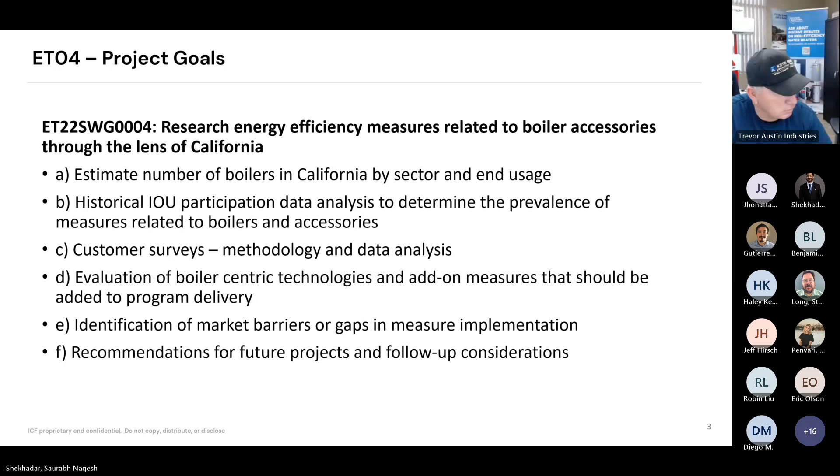This slide summarizes the project findings. We interviewed about 25 boiler manufacturers and distributors and derived or identified 11 add-on related measures from those discussions. Also, we identified about 10 measures from literature review as well as US Department of Energy tip sheets. The estimated efficiency increase ranges for all the identified measures and technologies from 1% to 8%.

As far as the barriers in measure implementation are concerned, we identified that some of the barriers were space constraint, variability in sizes of boilers, as well as high upfront cost. During the course of the project, at different milestones, we segregated the identified measures into three categories: near-term hits for the program, suitable for field or lab testing, and the list of non-viable measures.

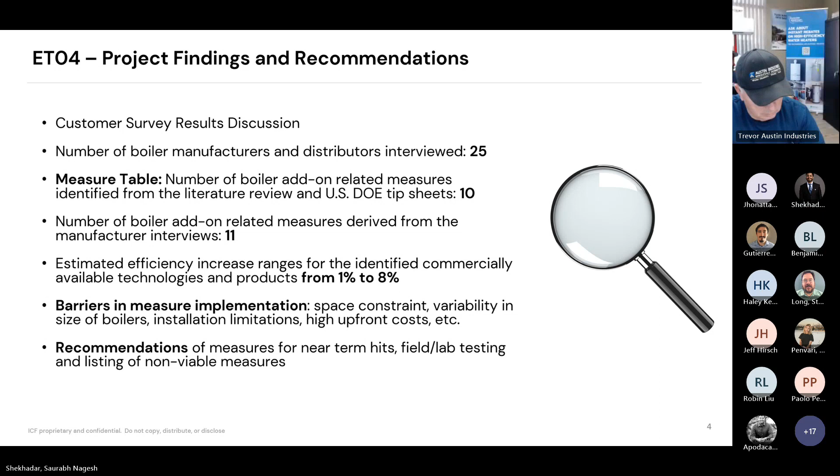Boiler systems are used to produce steam and or hot water, which is used for several primary purposes, such as space heating, domestic hot water usage, and pool heating. The boilers are further categorized into industrial, commercial, and multifamily types.

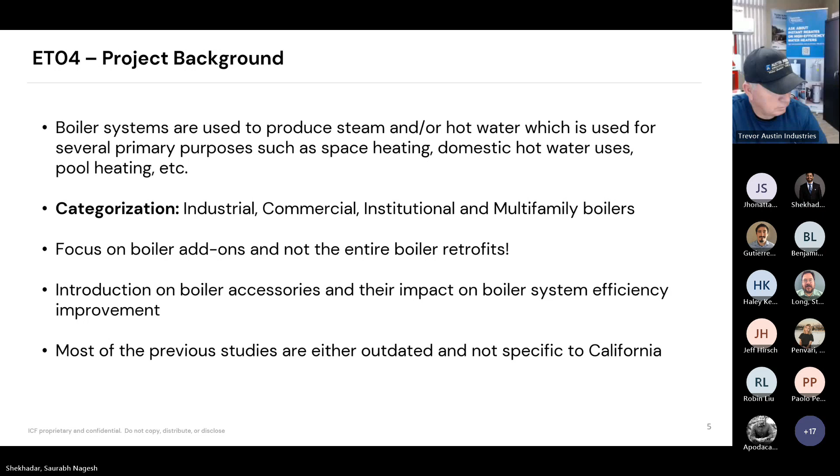This project focuses primarily on boiler add-ons and not the entire boiler retrofits. The objective was to learn more about emerging technologies in that segment and their impact on boiler system efficiency improvement. So let's proceed to the next section, which is literature review.

This slide summarizes the boiler inventory characterization in the US. As you can see in the first pie chart, the natural gas boilers are lower capacity boilers compared to other fuel types. You can see the segregation with respect to different fuel types as well as their installed capacities, for the entire US, and also the categorization of boiler counts in the state.

For estimating that inventory, we leveraged multiple data sets. The first one being publicly available boiler licensing data, shared by air quality management districts in California, compiled from the data shared by about 10 AQMDs in the state. The second source for estimating boiler counts was the Cadmus multifamily study, conducted in 2019. You can see the numbers and their categorization with respect to different sectors such as multifamily, industrial, and commercial.

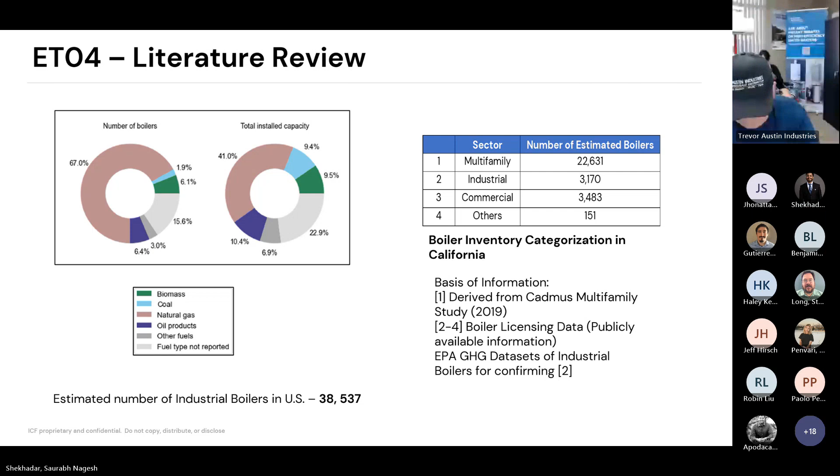These are the findings from the Cadmus multifamily study. One of the important findings was that the end usage most often served is domestic hot water heating, and pool heating is the next prevalent use. As far as the utilities are concerned, SoCalGas territory has the highest number of multifamily boilers among the three major utilities in California.

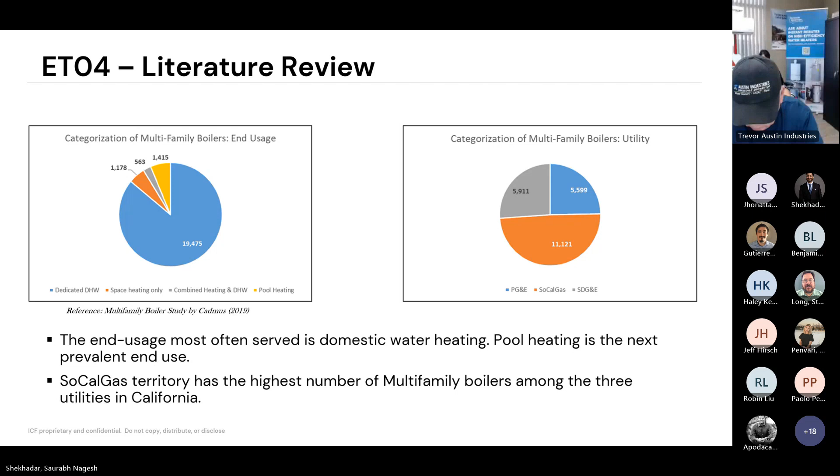During the literature review milestone, we also reviewed boiler studies previously completed in other states, such as Oregon and Minnesota. This slide summarizes the findings from those studies. The Oregon study highlighted that focusing on improving the design and performance of condensing boilers is important. Also, another field study indicated that on-field operation had better than expected space heating performance for condensing boilers.

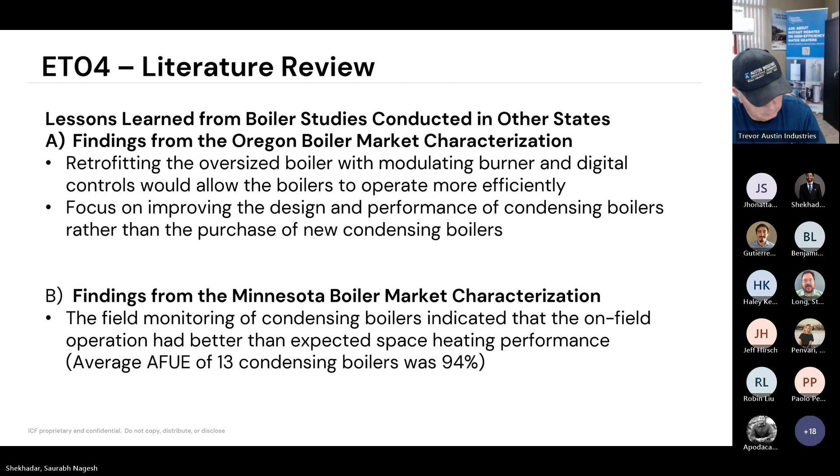Let's move on to the next step where we reviewed the US Department of Energy tip sheets. USDOE has published several tip sheets, particularly for boiler accessories, and we reviewed and understood some fundamentals of that and correlation between different parameters and their impact on efficiency improvement as well as fuel savings. These are some of the snapshots pulled out from those tip sheets.

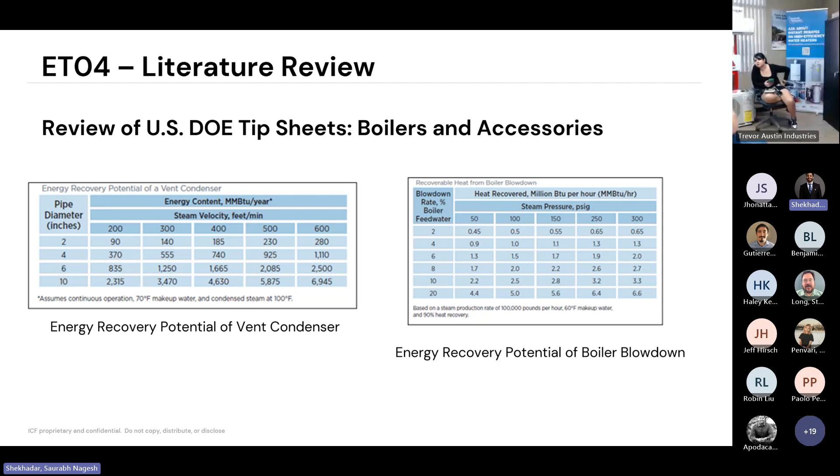Also, those indicated some rules of thumb in industry, which is helpful in estimating percentage fuel savings or percentage efficiency improvement. These are tip sheets related to burner upgrades as well as energy recovery potential of economizers.

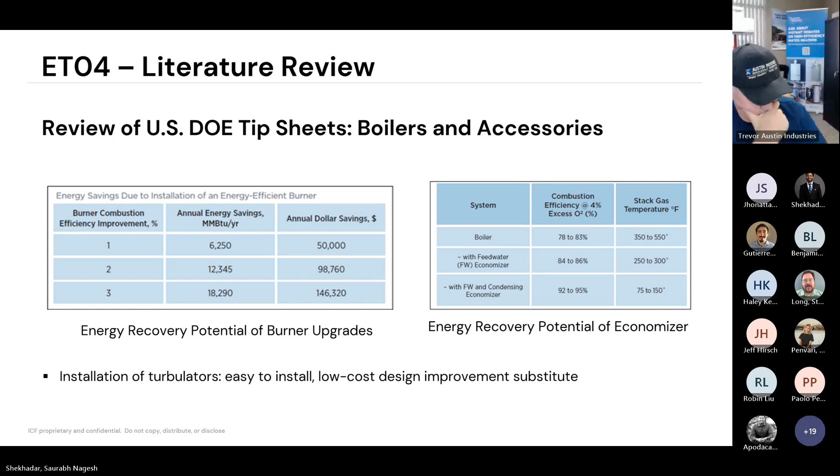The next milestone or the next section is historical IOU participation data analysis and customer surveys. California Energy Data and Reporting System, which is CEDARS, manages California EE program data reported to the Commission by IOUs and RENs. We analyzed these claims submitted during the period of last 5 years, starting 2018.

We also categorized the claims in different sectors, such as commercial, residential, ag, and industrial. And we saw that there were significant number of claims submitted under commercial and residential sectors compared to agriculture and industrial.

Some custom category claims were also identified or included, which were VFDs on combustion fans, stack economizers, system insulation, etc. But this highlighted the significant opportunity for measure package development related to boiler add-ons.

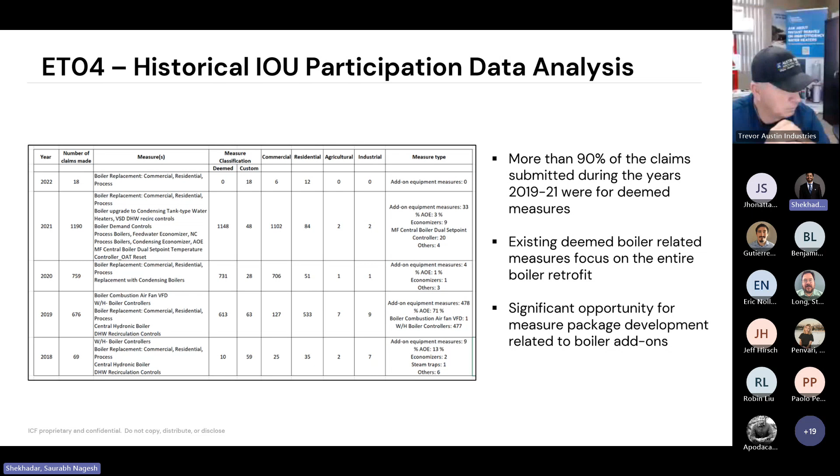As I said before, customer survey was an important element of this study, and we reached out to about 4,400 contacts, customer contacts received from AQMDs, as well as confidential data requests from SoCalGas.

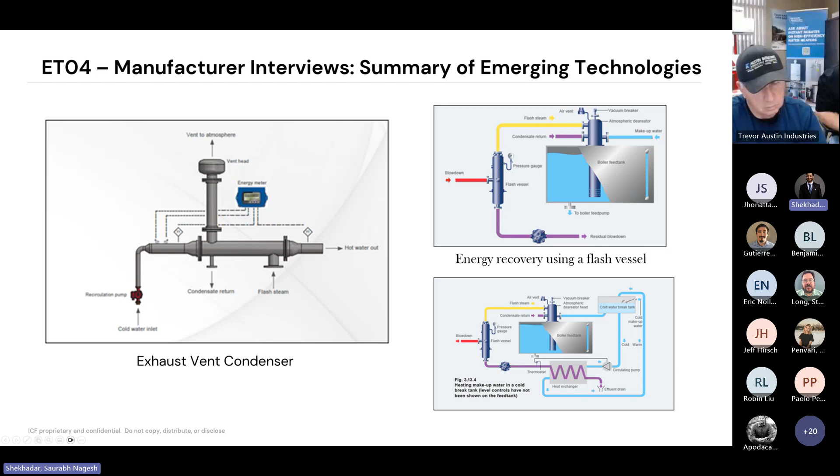Boiler blowdown is carried out to control the amount of TDS in the boiler, and the discharged water is hot, dirty, as well as pressurized. This generates a lot of flash steam when released at atmospheric pressure, which provides an opportunity for heat recovery. The second half of the slide discusses incorporation of a flash vessel, used to recover energy from flash steam, which facilitates separation of hot water and flash steam. The flash steam directly goes to the deaerator, and a heat exchanger increases the temperature of boiler feed water using that hot water. A cold water break tank is useful for applications where there is no simultaneous flow of boiler blowdown and makeup water. This technology is estimated to increase boiler efficiency by 1.7%.

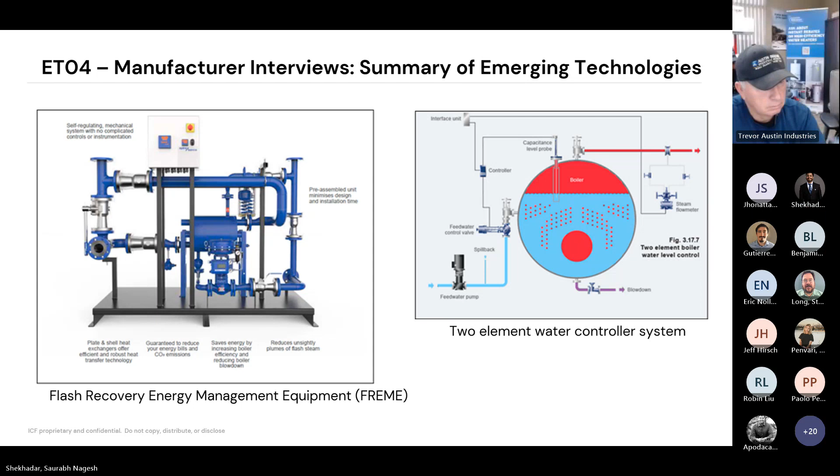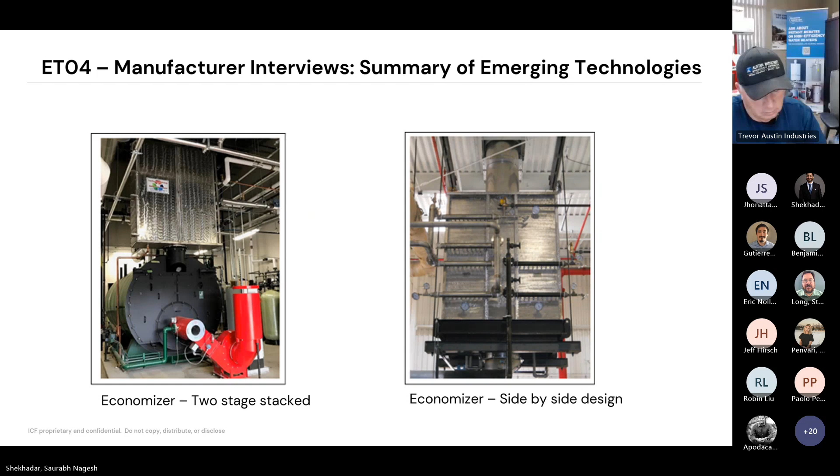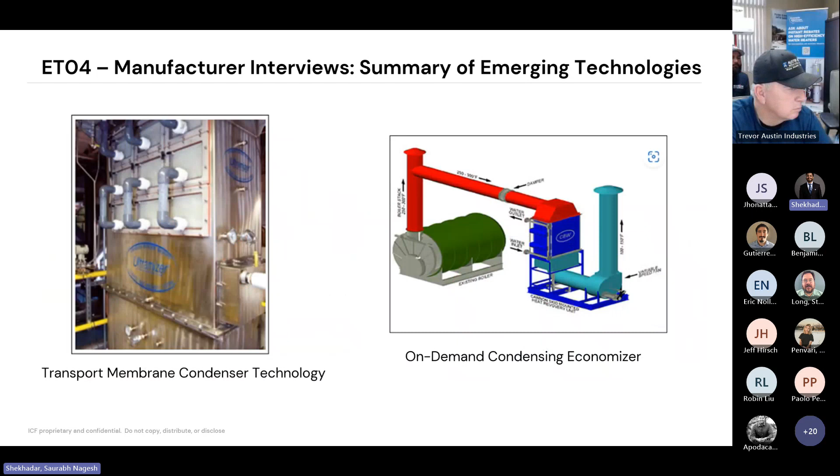The second half of the slide is on the on-demand condensing economizer, which is suitable for sites having space constraints, and this heat recovery unit can be installed at, say, 100-foot distance from the boiler and can be invisible to the boiler system. The operation of the unit takes place when hot water is needed and heat is available. For this one as well, multiple boilers can be teed up to one on-demand economizer system, which is another advantage. But there's addition of a control system as well as a fan to avoid any back pressure and condensation concerns. The manufacturer indicated that typical payback for this system is 1 to 2 years - the on-demand economizer one.

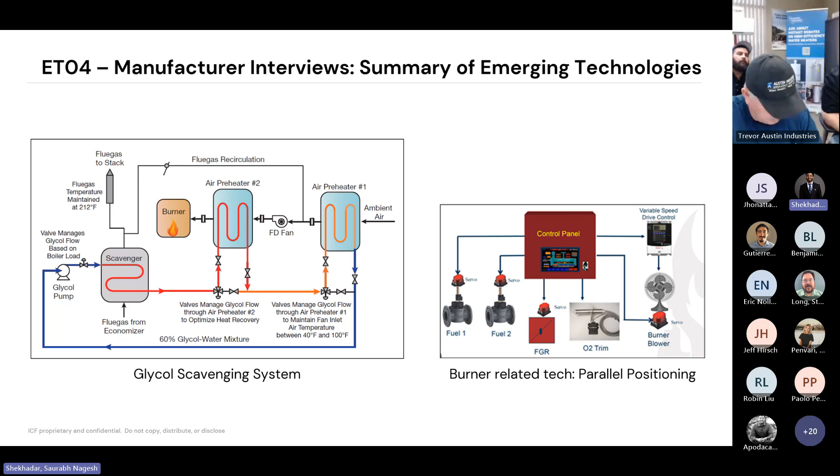This slide also has FGR, which is flue gas recirculation. Again, it's an effective way of reducing NOx, but it has negative or no major impact on increase in boiler efficiency percentage.

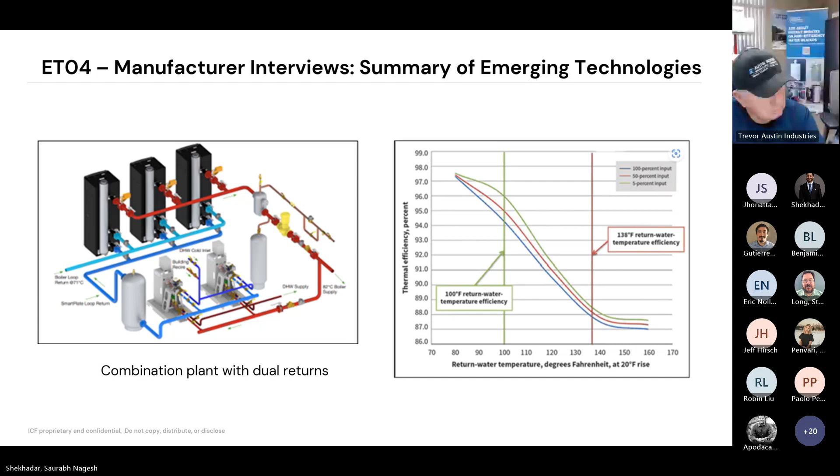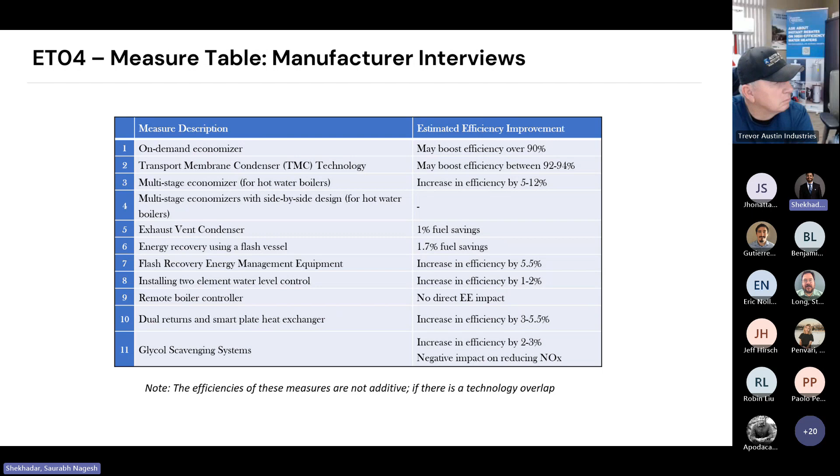So we talked about different products, equipment, and systems or technologies in the boiler accessories segment. This is the summary of different measures and the efficiency levels. I tried to share the levels in terms of ranges or tentative figures which were shared to us in those interviews or discussions. But please note that those efficiencies are not additive, particularly if there is a technology overlap.

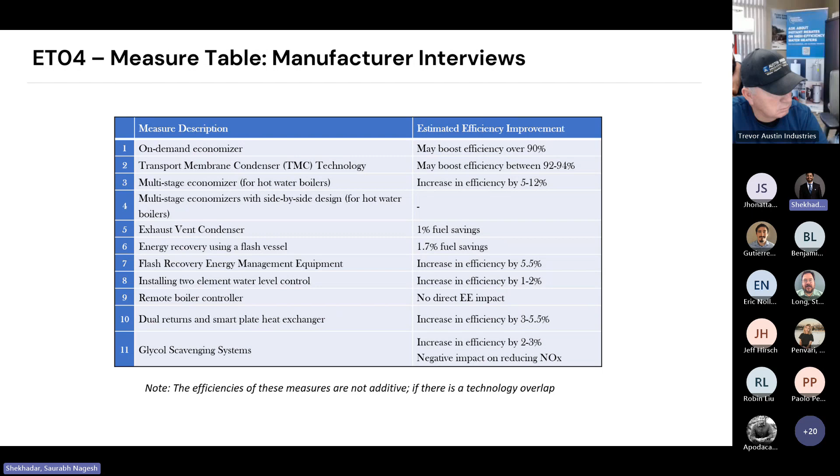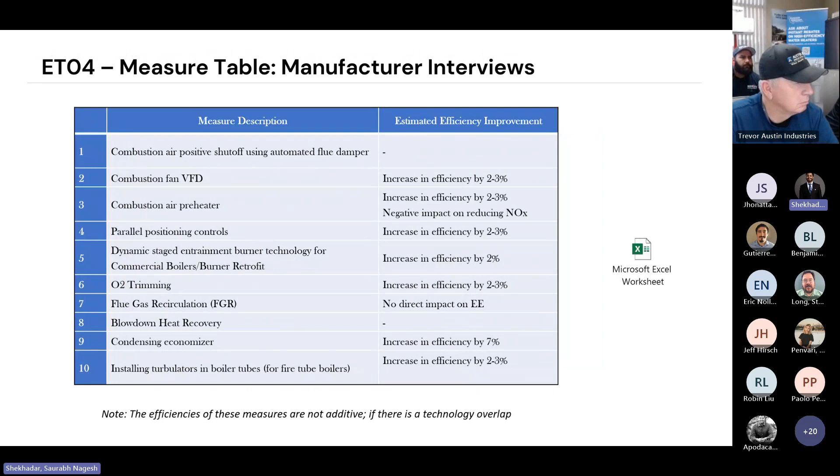So let's proceed to the last section, which is results and recommendations.

So we saw and we discussed about the estimated boiler count in the state. In the first project milestone, we tried to estimate the boiler count in the state and its categorization with respect to different sectors such as multifamily, industrial, and commercial. We leveraged different data sources in order to complete that step.

The historical IOU participation data analysis indicated that more than 90% of the claims submitted were for deemed measures. We also discussed the customer survey results and the measures that were found to be prevalent from the 46 responses that we received.

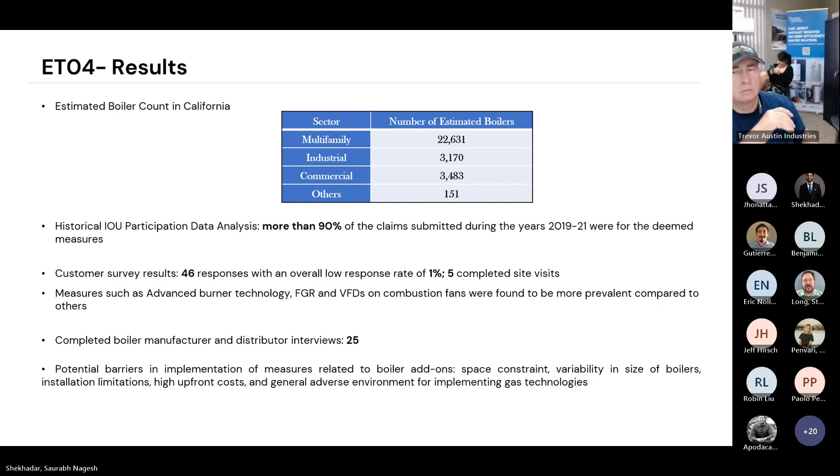Other major component of the study was boiler manufacturer and distributor interviews, and we discussed different technologies or products and their impact on overall efficiency of boiler systems.

From customer surveys, site surveys, and manufacturer interviews, we tried to understand the potential barriers in implementing measures related to boiler add-ons, and we tried to understand why some measures are implemented more compared to others. And some of the measure barriers that we identified were space constraint, variability in size, and high upfront cost.

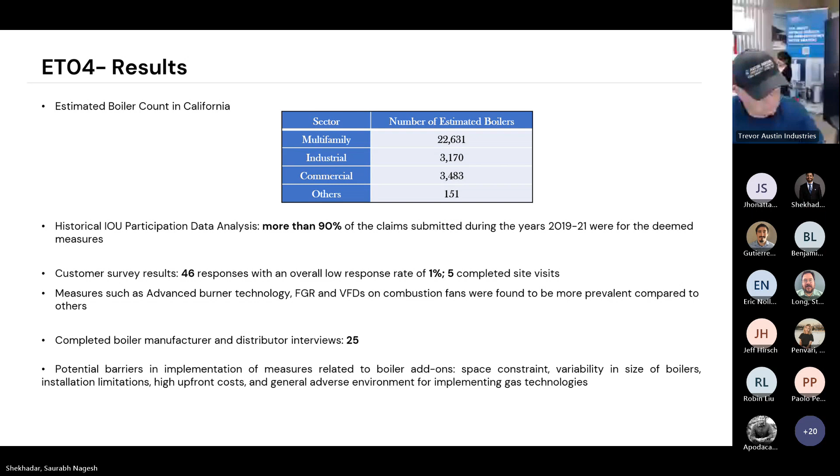So this is the last slide or conclusion slide on different technologies or products related to boiler add-ons. We tried to put them in 3 baskets. The first one being good candidates for near-term hits for the program, and the second one being those which require additional testing, field testing part.

The third category is the list of technologies which are not viable for further development. Some of the reasons for including those measures there were impact on NOx as well as impact on EE. So as we discussed, one measure had positive impact on NOx reduction, but no impact on EE. So those are included there.

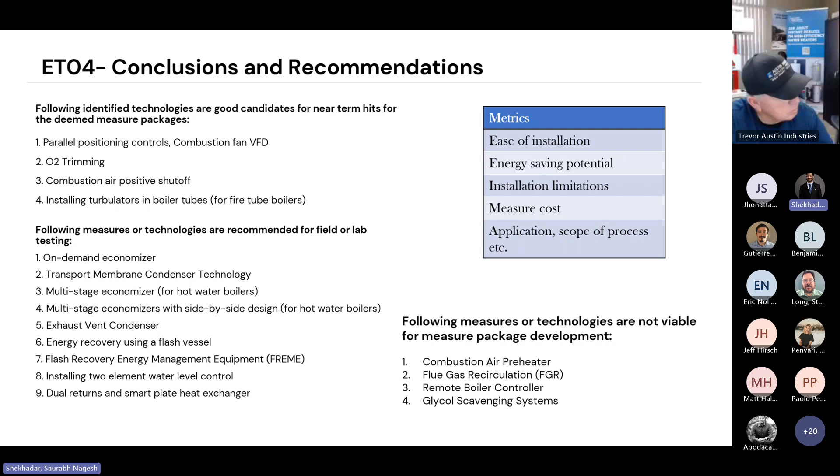Some measures may be particular to a specific system or application and might require additional analysis in terms of field testing or lab testing. So we have included those technologies or measures in the second category. The metrics that we used for putting different technologies or products into 3 baskets were ease of installation, energy saving potential, installation limitations, measure cost, etc.

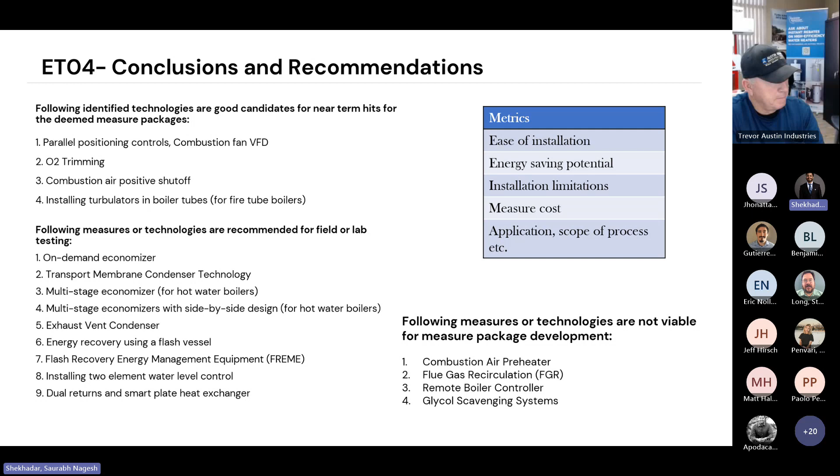Before we move on to Q&A, here is a brief note about the upcoming outreach event. The next one is on another completed GET project, which is ultra low NOx burners. It is scheduled on November 7th, and a separate invitation will be sent out soon.